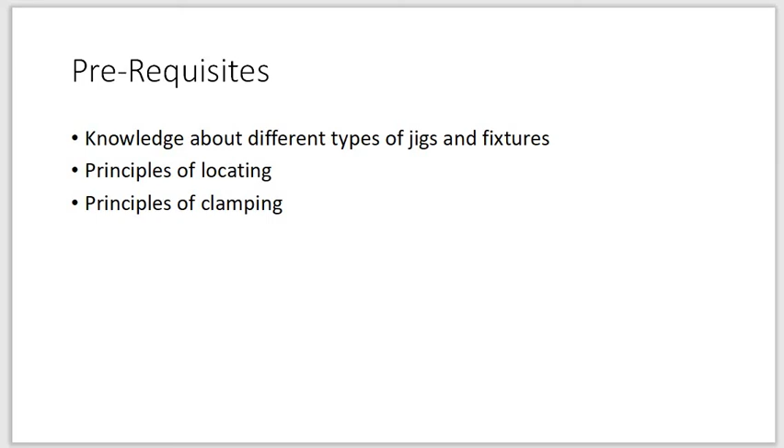And then we have to give proper supports. Supporting systems are some complementary systems along with locators. In some cases locators will not be sufficient. We will see about this later.

And then tool guidance. We know the difference between jig and fixture, right? In case of jig, tool guidance is provided with the help of drill bushes. In some cases, like milling fixture, the tool guidance or tool referencing will be given with the help of setting blocks. That also we will see in the future.

And finally, we have to give the whole picture - that is the drawing of the whole work holder we have designed, whether it is jig or fixture. The drawing is the final step. This final drawing will have the framework, that is the jig body or fixture body, which will house all the previously designed elements - the locators, clamps, supports. Everything will be fixed into a framework which gives the total structure of the work holder.

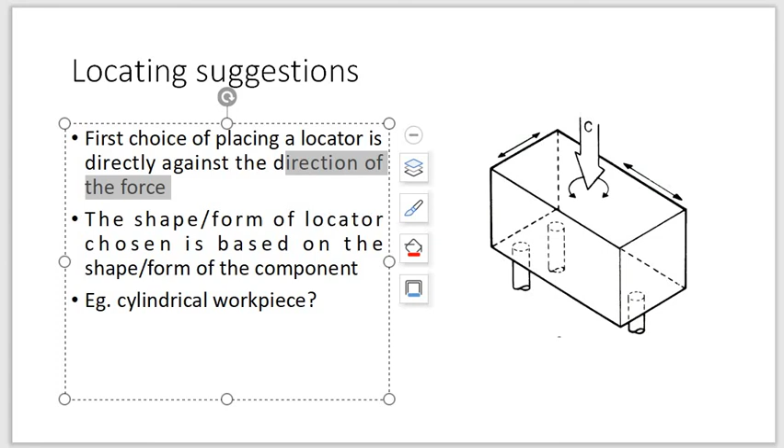And then clamping. In locating, you arrest the degrees of freedom pertaining to the direction of the cutting forces. In clamps, the other degrees of freedom will be arrested. These clamps hold down the workpiece while the operation is performed. In practice, they are applied using bolts, straps, and various clamping devices, which hold down the workpiece when the manufacturing operation is performed.

Where should you apply the clamps? From the principles of clamping, you will know to keep the clamps always against the locator. Why is that? Can you place the clamp anywhere you like? No - usually you will arrange the clamp directly against the locator.

In this case, where will you place the clamp? You will be clamping from the top, against the locator, because the locators give a positive stop - they will not yield. If you clamp the workpiece from the sideways, is there any positive stop there? No. If you apply clamping force there, the workpiece will move from this direction to that direction. So you will always apply the clamping force against the locators.

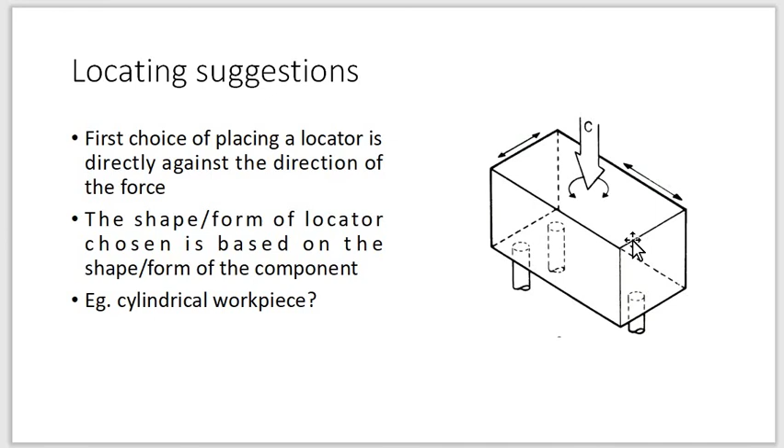So in this case you will place the clamp from the top - you will always place the clamp against the locator. Another thing is that the clamping force must be applied without causing any elastic deformation, because clamping is not for holding the workpiece against the cutting forces - that is done by the locator. Against the cutting forces, the workpiece is supported with the help of locators, not the clamps. The clamping force is just for holding the workpiece while performing the operation, so it should not be high enough to cause deformation, but it must be sufficient to hold the workpiece in place while performing the operation.

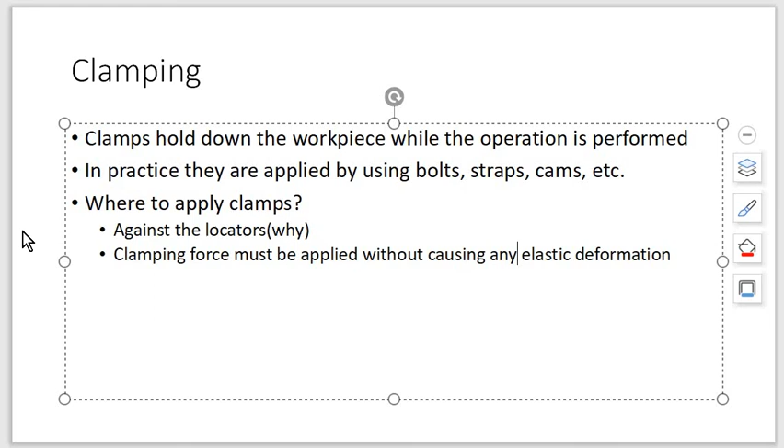And then supporting. As I said earlier, supporting complements the locating. Sometimes the locating points are not sufficient to absorb all the loads acting without causing elastic deformation. Take this example: it is a cylindrical component, and if you are going to drill here, this long shaft is overhanging. So if you apply only a locator here, this surface will become loaded and may deform.

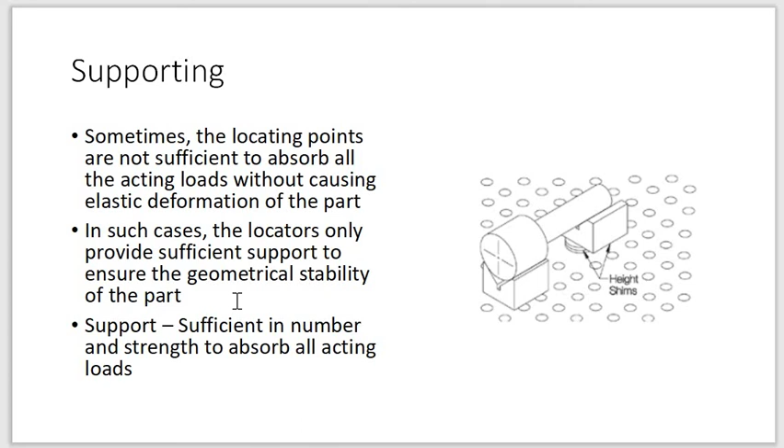So in that case you will give additional supports here. In such cases, the locators only provide sufficient support to ensure the geometrical stability of the part. Supports are not always present, but in cases where the locators are not sufficient to withstand all the load, you will give supports. The support should be sufficient in number and strength to absorb all the acting loads.

Then some suggestions for giving the supports. The supports you will use should not interfere with the locating points, and then it should not interfere with loading and unloading.

Clamps also have this principle. Clamps are only used to load and unload, right? The clamp should not interfere with the cutting tool. Likewise, these supports should not interfere with loading and unloading.

And these supporting systems should not produce any geometrical redundancy. You should know what redundancy is, the redundant location principle. Providing additional extra locators where you have already arrested the degrees of freedom, that is redundancy. Likewise, you should not provide any additional supports like redundant locators.

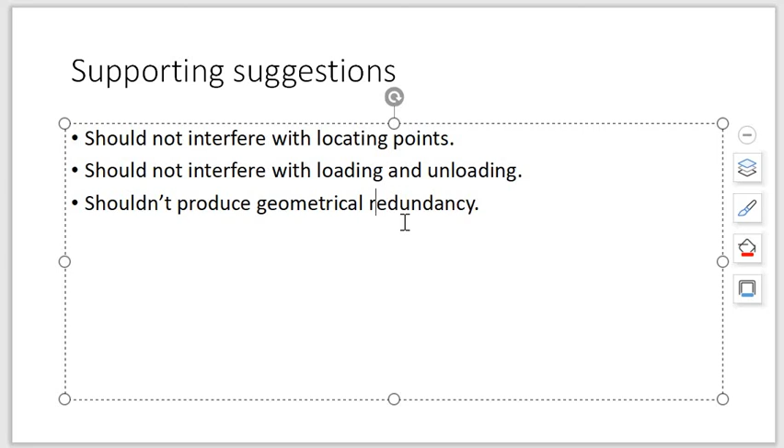And then tool guidance. In case of drill jigs, it is very easy. Wherever the hole you are going to drill, you will keep a drill bush above the hole. That is the tool guidance. Through the drill bush only the drilling tool will enter.

In case of fixtures, you will use some referencing tools like setting blocks. Here in this string milling fixture, this one is the setting block. It is purely given for giving reference. When the milling cutter comes from here, this is the depth of cut. For that much depth of cut, you have given reference.

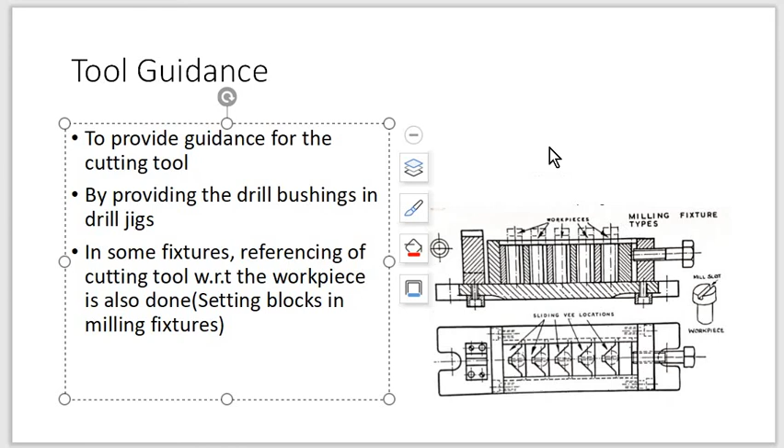Using this setting block, it will be set such that the milling cutter just touches the setting block, and then it will move and cut away the required depth of cut in the workpiece. So this is the tool guidance feature.

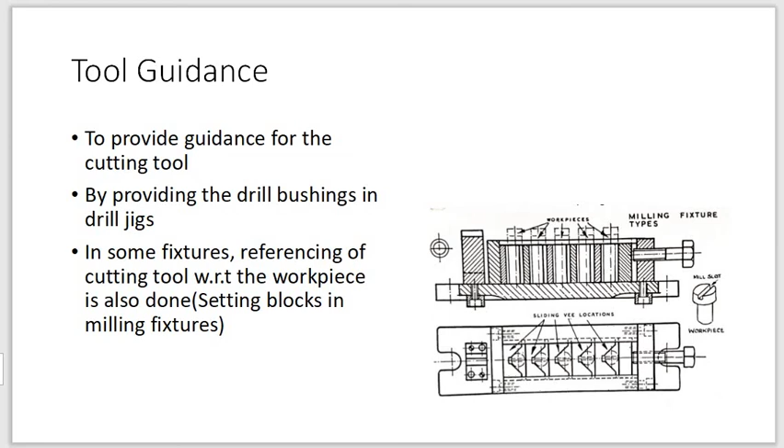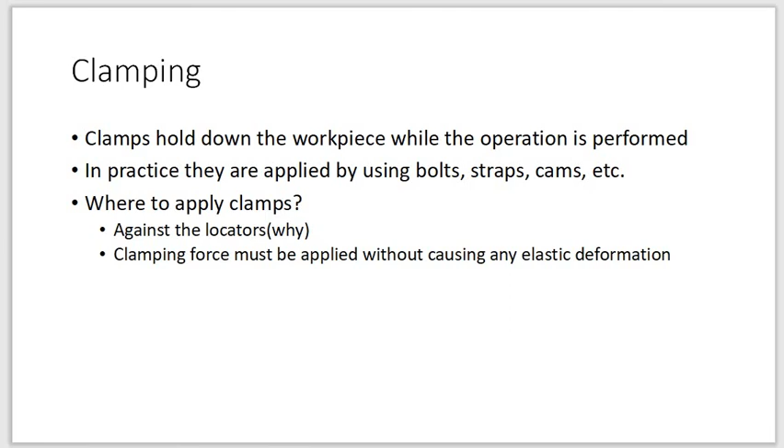And finally, so far what we have seen: for a given component you have to give proper locatings, and then you have to give clamping, and then if support is needed you have to provide that, and then tool guidance, and finally you have to...

Get the whole picture, that is the whole work holder. You have to draw the whole framework, that is the jig or fixture that carries all the individual elements like locators and clamps. This jig body or fixture body should have enough strength and rigidity to hold the locators and clamps in proper places under load.

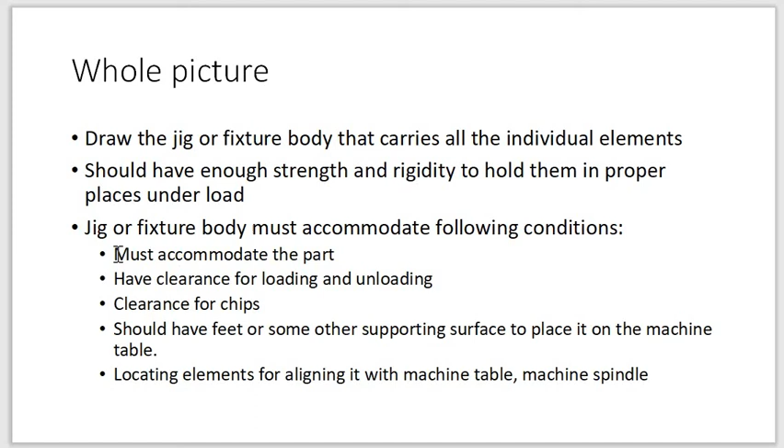While designing this jig or fixture, you should have these points in mind. First, the jig or fixture body must accommodate the component, and as we discussed earlier, we should select the jig based upon the form and shape of the component. So the proper jig will accommodate the given component, and this jig body should have proper clearance for loading and unloading.

If there is not enough clearance, loading and unloading will become difficult, because the component may get stuck inside the jig, and unloading the component becomes cumbersome. So you should provide enough clearance for loading and unloading.

And then clearance for chips, for chip removal. What will happen if chips get stuck in the work holder? We have already discussed this - if chips accumulate in the work holder, it will affect the accuracy of the job. So we should avoid these chips by providing clearance.

And then the jig or fixture should have feet or some other supporting surface to place it on the machine table. If there is no feet or supporting surface, the work holder may tilt while performing the operation, which will result in inaccurate jobs. So it should have proper supporting surfaces or feet.

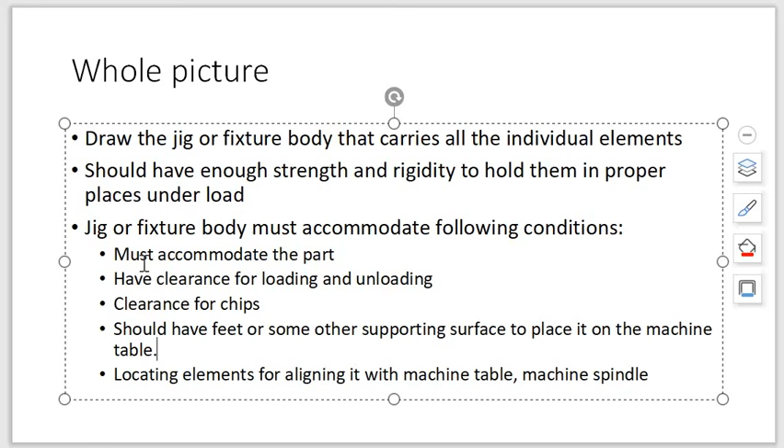And then the locating elements for aligning it with the machine table - the work holder will be fixed on the machine table. For locating that work holder, we should have some locating elements. So you should keep all these points in mind while doing the final step, the jig or fixture body, that is the framework of the work holder, which will house the previously designed elements, the locators and clamps.

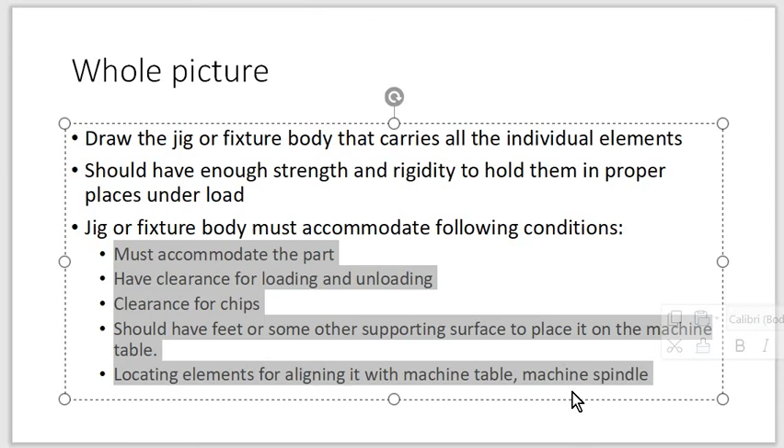So for designing a jig or fixture, these are the steps to be followed. First you design a locator, then a clamp, then supporting elements if needed, then tool guidance - which is not a big step, since in jigs you only provide tool guidance in the form of a drill bush. And then the final step is drawing the whole picture of the work holder.

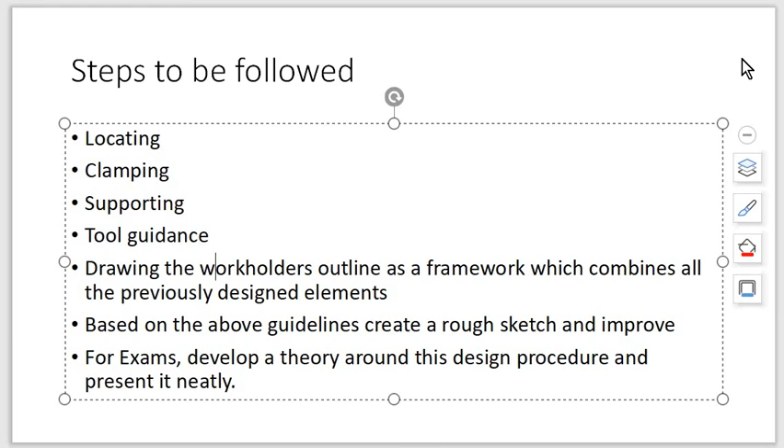Okay, we will look at a problem in the next session.